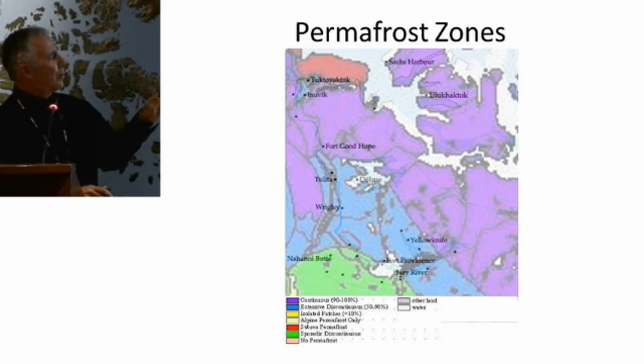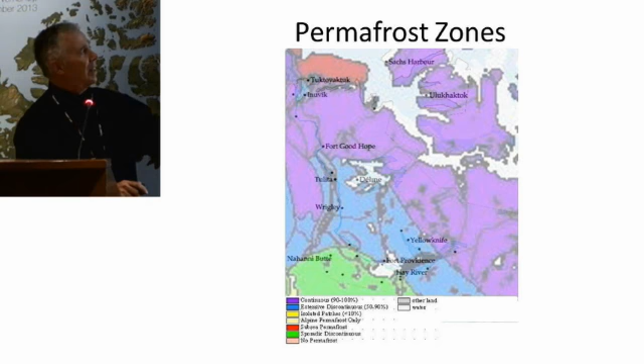I sort of take issue with the way this map describes extensive discontinuous, because as anyone knows, the Mackenzie River is warming, and I would believe that the discontinuous would follow the Mackenzie River as it seems to do here, but even farther north than shown on the map.

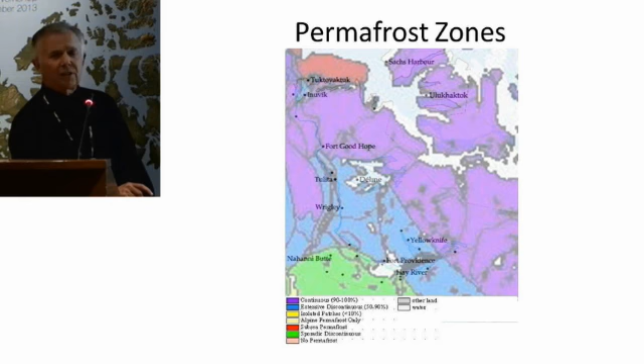These are our sites where we're monitoring the ground temperature to date, and the temperature is monitored each week. The thermistors in the ground vary with the size of the building, of course, but the thermistors are buried into the ground at depth, and each of the thermistors records temperatures and sends that record to a logger.

There are 8 sites. Western Arctic Research Center is not being monitored by the GNWT. They're monitoring their own data. We will likely combine the data with them at some point in the future, but we've been doing this for 11 years now.

but this particular site is shown in distress at this point in time because some of the thermosiphons have failed due to running water that's flowing beneath the building and eroding the permafrost.

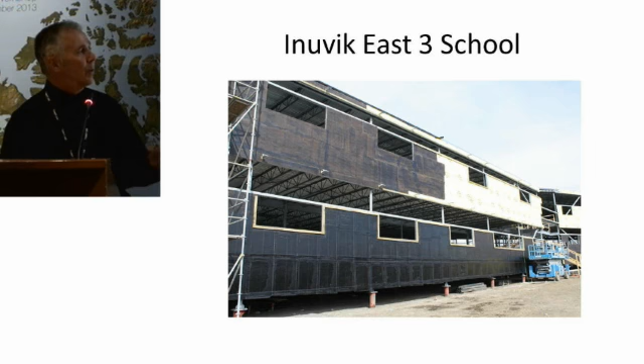This is the brand new school in construction phase, taken last year. This school is set up on piles as opposed to thermosiphon foundations, and the piles are quite deep. They're also in Inuvik. But thermistors were placed throughout the underside of this building as well, and we're recording the ground temperatures under the school to ensure that they remain stable, because these piles rely on the frozen ground for bearing.

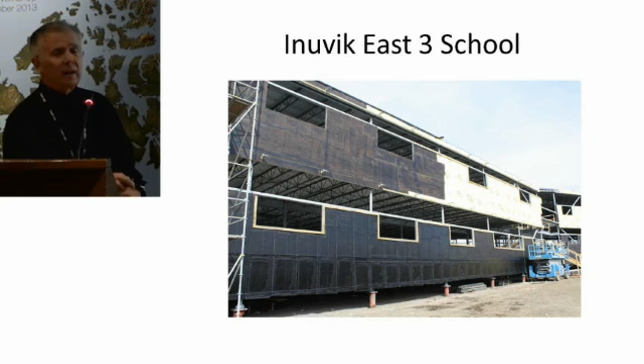These are the piles underneath the school. The piles vary in depth, but they go down as far as 15 meters.

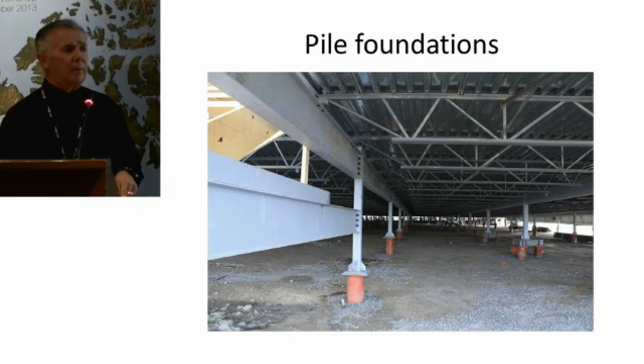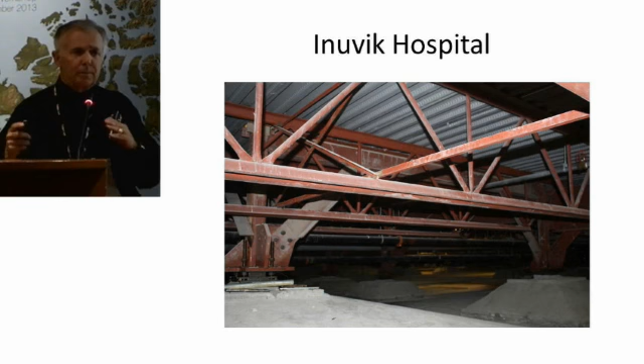The Inuvik Hospital was, as I mentioned earlier, one of the first thermosiphon foundations built in NWT. It was back in 2000. And the entire building is on a big block of ice that's kept frozen by thermosiphons. And these concrete pads support the floor. It's a one-story building, and these pads can be adjusted by this kind of jack system. And they maintain the adjustments continually throughout the year to make sure that the floor of the hospital is level.

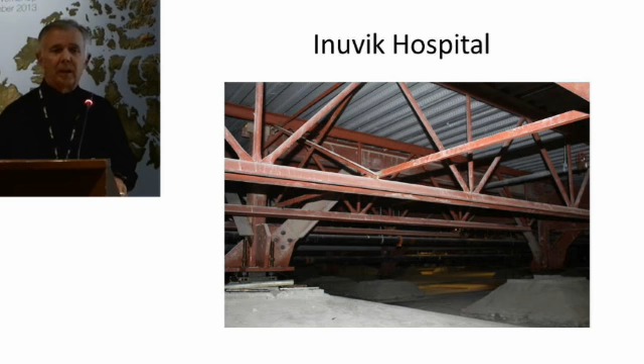So the monitoring provides an indication as to the temperature of the ground, and if it does get too warm, there are louvers along the skirt that can be opened up and air is allowed to flow through, thus cooling the ground.

Tulita is the most southern of our monitoring installations. This photograph is before the building is in existence, of course, and we're looking at the drainage pits and the utilities. But as you can see, this one's also on thermosiphons, and the thermosiphons are essentially keeping the ground frozen and supporting the building itself. The building itself is a slab, and it's sitting on top of the frozen ground.

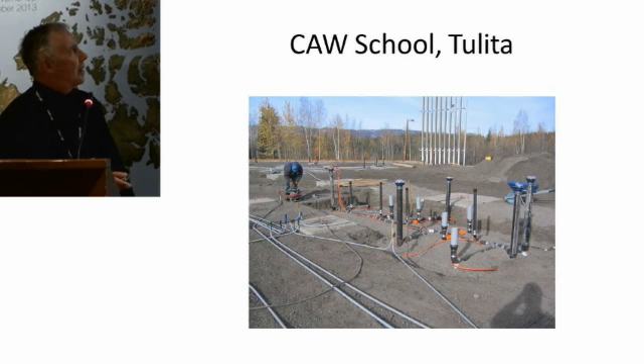Work was discussed by Ed in his last talk also. The Western Arctic Research Center in Inuvik monitors their ground temperatures as well. They keep records of their own. We don't log their data. So at some point in the future we will call the Western Arctic Research Center and say, can we have your data? We're going to add it to ours so we have a better picture of ground temperatures, at least in Inuvik, where most of these facilities are located.

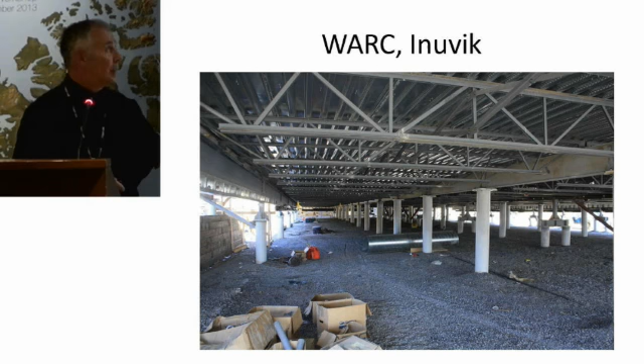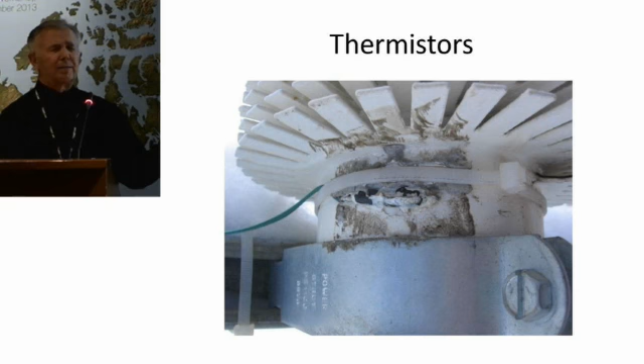The actual thermistors are just thermocouples that are buried in the ground, and it's just an electrical resistance that's generated by temperature. And the electrical resistance is then, well, there's a formula, and it generates a temperature for that particular level in the ground. And this one happened to be on the bottom of a radiator, but they're generally buried.

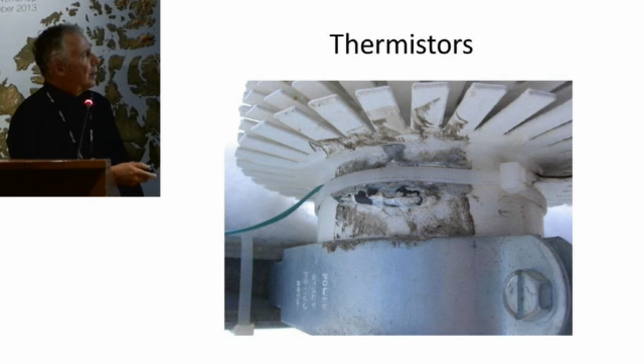This is the data cable that goes to the thermistor here. All the thermistors that are buried into the ground go to this data logger where this temperature information is held. Capacity varies with how much data it can retain, but the GNWT will pull data off about 2 or 3 times a year.

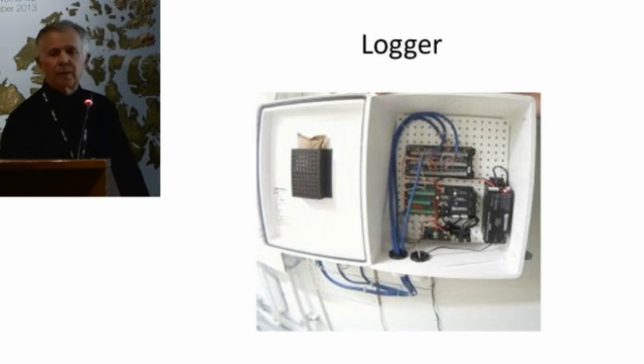And when we pull it off, these data loggers, which have, by the way, a modem, and we dial into them from a central location. This is the software that we're interfacing with the data loggers. It's called LoggerNet. Campbell Scientific in Edmonton sells this stuff. But for each site, we have a unique phone number, and we'll call it up and download the data from the data logger.

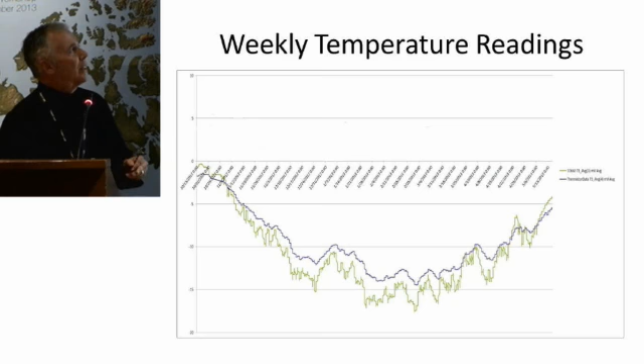And then once we have that data, it looks something like this in a graphical format, which shows you a reading every 7 days from October 15th to, I think it's June. This particular thermistor string is for the Inuvik Young Offenders Facility, and it's string number 4. And this is what we get in terms of temperature data spread over time. I apologize for the small print, but it's the only way I could get it on a slide.

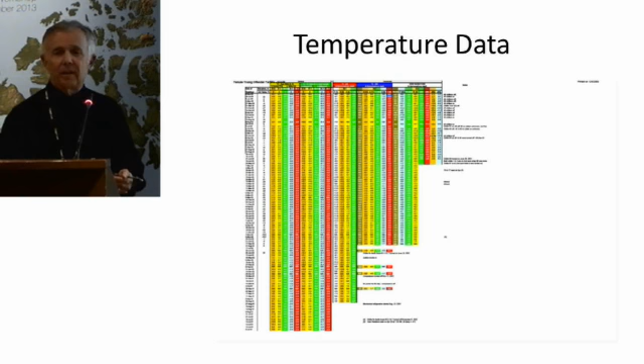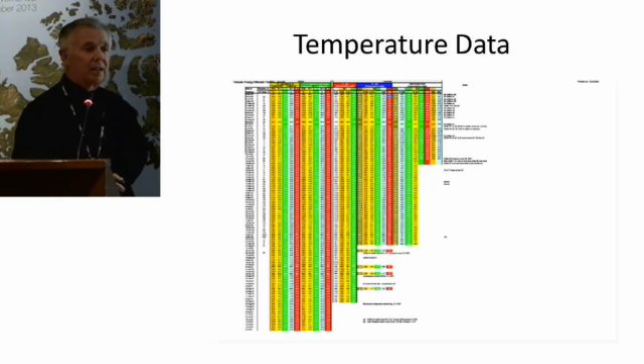And once it comes to Yellowknife from Inuvik, it's analyzed there, and we make a determination whether or not there's a problem with our ground temperatures. In this case, it would be with a thermosyphon foundation, which is critical to act upon when you see fluctuations that are extreme. Going forward, I'd say a lot of data is required. We're just scratching the surface at this point.

What the GNWT is committed to date is to adapt these strategies of the 4 new CSA standards that CSA is currently working on. One, the thermosyphons, I think it's up for public review now. I don't know if anybody has downloaded it or looked at it yet. Community drainage is another one that is currently in the works. Permafrost protection, I don't know if that's out yet, but it's very close. And snow loading, which I believe Mark's going to speak to.

What the GNWT plans to do with collecting data is to come down the Mackenzie River Basin, because it's probably obvious why. The Mackenzie River is warming up. There's been a number of studies that indicate that this river is getting warmer each year. Because of that, it's having a dramatic effect on the permafrost along the Mackenzie River, where most of the settlements are. And because of the population that's spread along the river, this would be where we would find most of our infrastructure. So most of our assets are along that river.

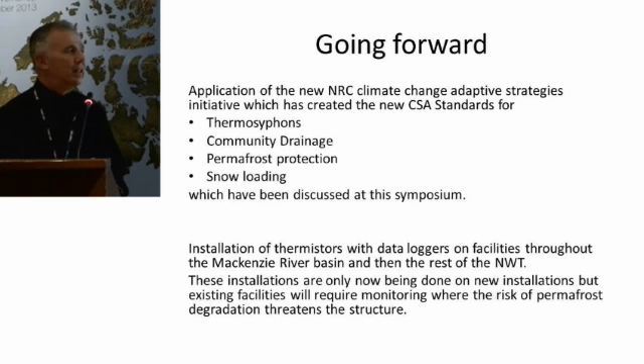For the thermistor installation, just to give you an idea of cost for these things, thermistor installation at Inuvik School, which was just completed last January, I believe we spent in the neighborhood of $75,000 to $80,000 there. So if you take it as a percentage of construction costs, it's very, very minimal, and it can be done easily when buildings are being constructed. That's about it for me.